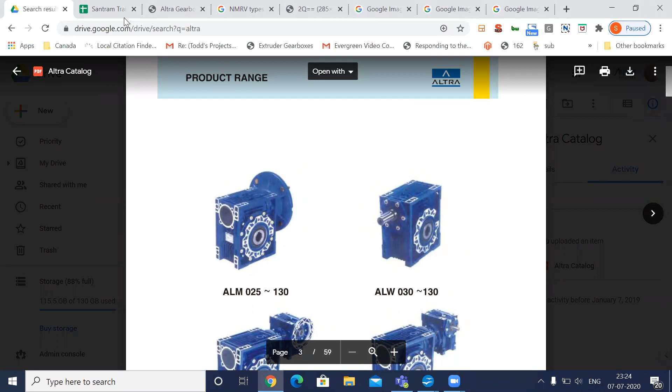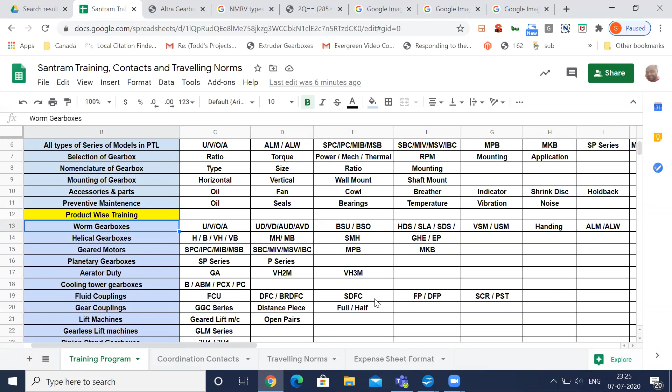Here, the motor may be ranging from 0.25 HP to 5 HP or maximum of 10 HP. Okay, so this is basically the catalog. The catalog name itself is Altra series, so it's an ultra light model. These are all starting from the size of your palm, and the bigger one is like 50-60 kg.

There are various mounting methods. So ALM series is the basic, ALW is the one that is input solid. The first one, the standard which is used mostly worldwide, is input hollow, output hollow. Okay.

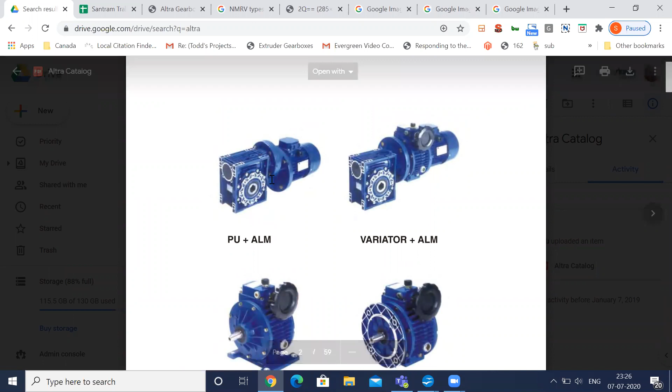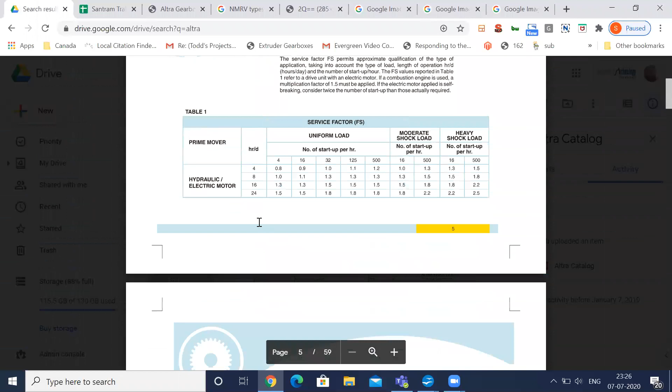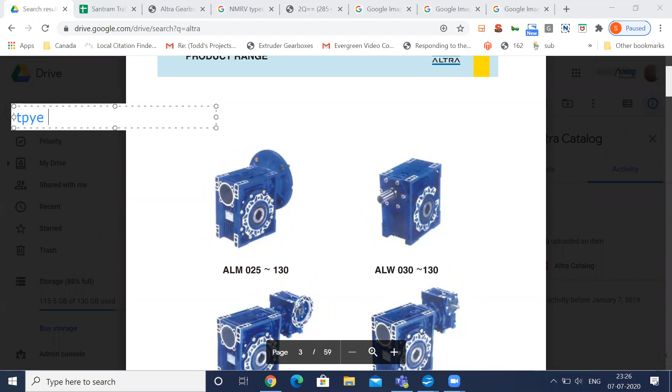Okay, so AL series is basically starting with the nomenclature part. Let me teach you what's the nomenclature part. As I've shown you guys earlier, nomenclature is type, size, ratio, and mount. This goes universal with any brand, anything. ALM series is the type. Size goes like 25 is the first model.

Ratio goes from 7.5 to 100 for a single reduction. And mounting is basically what is mounted at the input. It is the motor, so it will be the motor frame. The sizes go like 25, 30, 40, 50, 63, 75, 90, 110, 130, and 150. These are different model sizes.

So how are they measured? Let's talk about the sizes. Let us recall your memory: in worm it was inches. So like a 6-inch gearbox, we named it U600. In this case it is in mm.

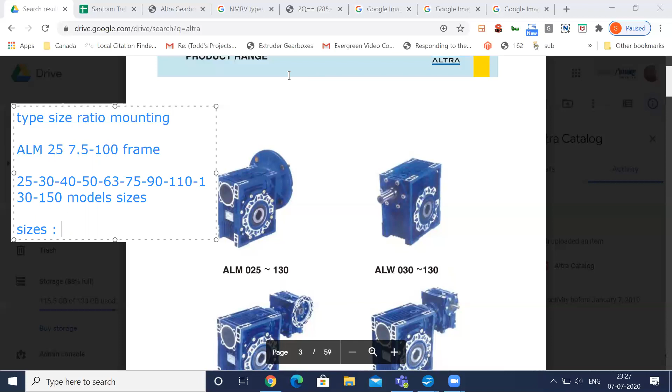Let me just draw for you. Here, this is the input part, this is the output part. The center perpendicular line between them, that distance in mm is the size of the gearbox. So if it's ALM 50, it means the worm shaft and the output shaft hole center to center perpendicular distance is 50 mm. Let me show you one drawing, that would be much clearer. Let me erase this.

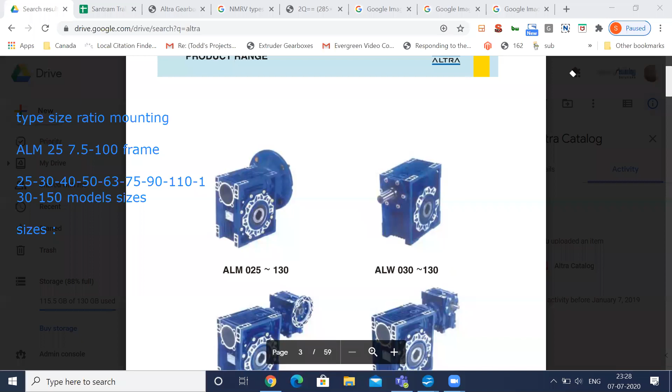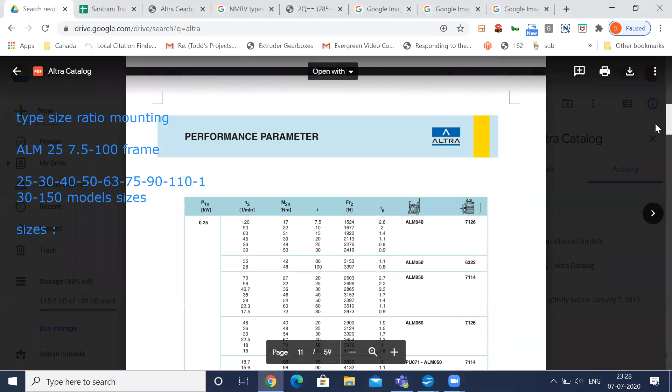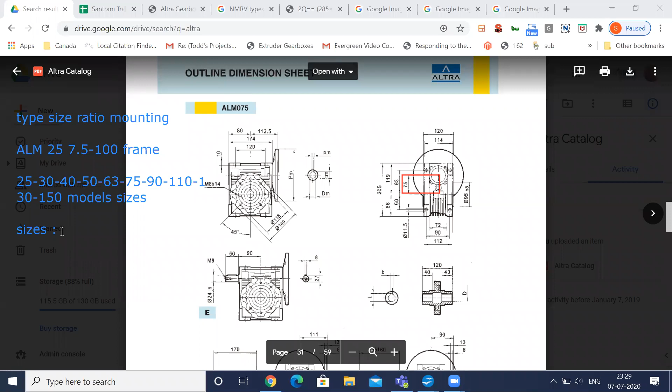Now we'll move on to the ratios. In standard worm, ratios were from 5 to 70, and for double reduction, you can multiply twice. So if you are using two gears of 20:1 and 30:1, the final ratio was 600:1.

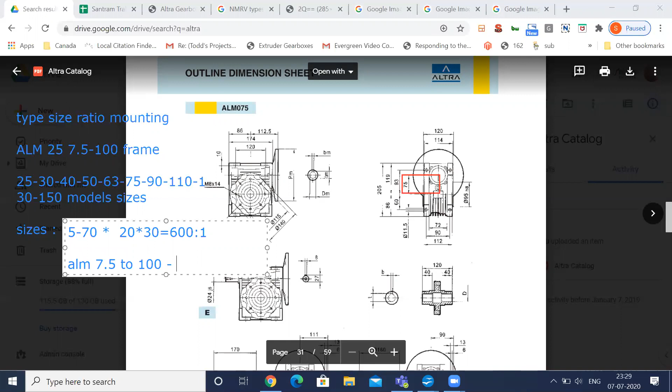But in this case, the ratios in ALM and ALW are 7.5 to 100. So a final RPM of 15 is also achievable in single reduction, but the 5:1 ratio is not available. Now we'll talk about the frame.

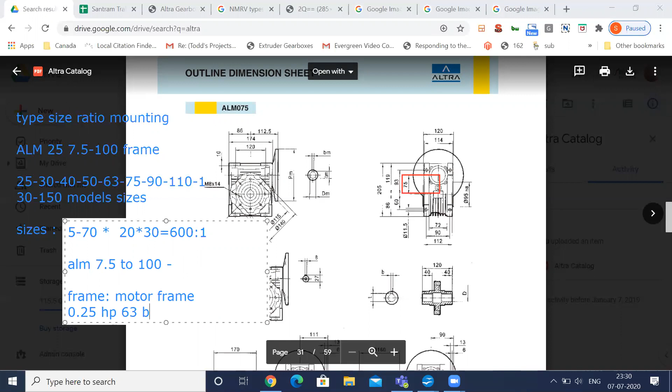The frame size is basically the motor frame. Motor frames are something which you need to learn from the standard, like 0.25 HP is 63B5. And next is like 0.5 HP, it is...